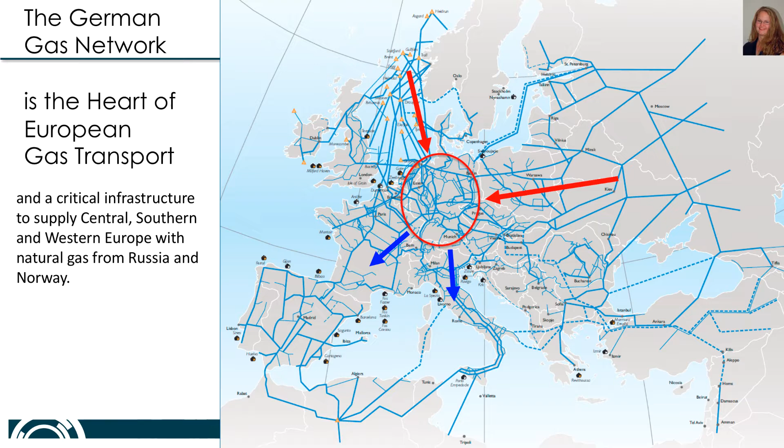The German gas transport system is located in the center of Europe. The majority of the gas comes from Russia and Norway and needs to be transported through the German network. Germany is the European gas hub. Only half of the gas entering Germany is actually consumed here. The other half is transshipped to secure the supply of Western and Southern Europe.

The liberalization of the European gas market in 2009 posed novel and difficult problems to transmission system operators. From the trader's point of view, the gas network is just a point, the virtual trading point, where you can inject or extract gas from. Limits are given by capacity products, either orders of firm capacity, which means guaranteed to be delivered, or flexible, which means the order will be processed best effort. The only other limitation is that traders need to make sure inflow and outflow are balanced over the full day.

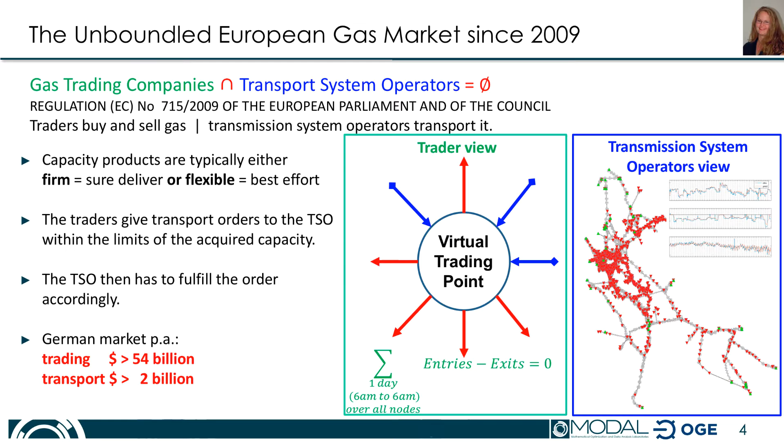From the transmission system operator's point of view, the network is a complex network. They have to ensure that all transport requirements of gas traders and consumers are met, even if this means gas injected in the north and immediately consumed in the south. Thereby, a transport market of about $2 billion enables a gas trading market of more than $54 billion.

The biggest German transmission system operator for gas is Open Grid Europe, that controls a network of 12,000 kilometers. This is similar to the size of the German Autobahn. To control the system, dispatchers operate about 100 compressor units with more than 3,000 valves. Keep in mind that this is a network built during the last 100 years and the oldest still operational part was built in 1916. There is no computer-readable description and it is not stuffed with sensors. This is solid engineering with 1,000 tons of steel.

Currently, the dispatching center is run based on measured data, which is only available in hindsight, and the experience of the individual dispatchers. A major challenge is the security of the gas supply. With the help of a high-end decision support system, OGE wants to meet these challenges and ensure safe, efficient and cost-effective gas transport. Because there's no comprehensive solution available on the market, OGE started the project Optimized Execution of Dispatching.

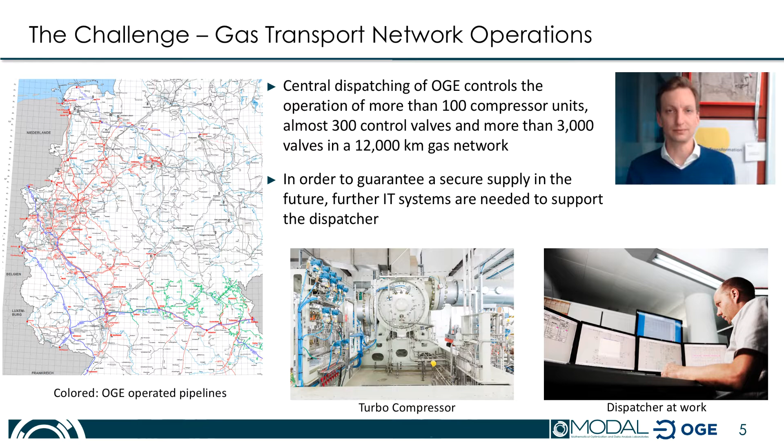The result of this project contributes to several levels of the OGE strategy. It makes an enormously important contribution to the sustainability of the company, especially since there's no comparable product on the market that solves our challenges. With the help of prescriptive analytics methods, it is possible for us to face the challenges of the future with composure. For example, past experiences cannot be transferred to the safe transport of hydrogen. Employees cannot scale increasing complexity and scope at will. Therefore, it is essential for OGE to have a decision support system in place to adapt to upcoming changes, such as market consolidation and the European energy transition.

OGE has invested more than $20 million in the development of the system over the past 5 years, and OGE has committed to continue the development cooperation for another 5 years. Savings of $1 billion can be achieved only for Germany due to the better network control and avoiding network expansion. This is a great economic benefit.

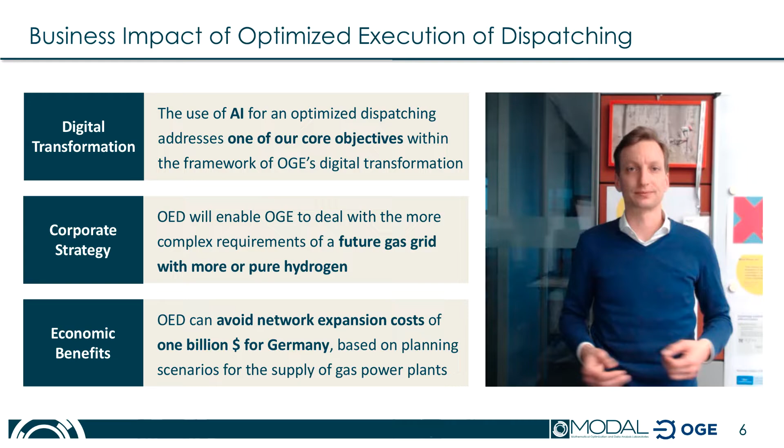Here are the main deliverables we have in the project. First, we needed a high-precision gas flow prediction. The system we implemented is 34% more accurate than the solution OGE had before. It has been in operation since 2018 and is continuously improved.

When Germany is going all renewable, there may come a day where the sun doesn't shine and the wind doesn't blow. To ensure the security of supply, several gas-powered power stations are declared system relevant, sitting on standby. If needed, these can jump into operation in less than 1 hour to provide gigawatts of power. But at the same time, they will instantly start drawing large amounts of gas out of the system.

As you have seen, the traders only have to balance their accounts on a daily basis. Now imagine the situation that the power station draws gas in the morning while the supplied gas is only fed into the network at a distant entry in the evening. Such a situation can endanger the security of supply.

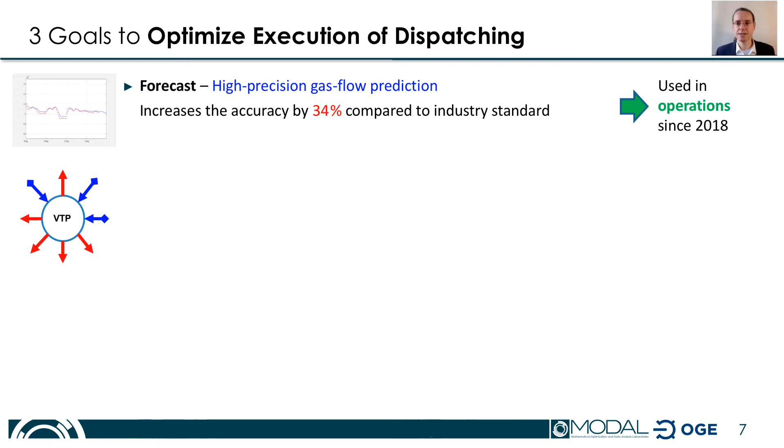One solution would be to build new pipelines. And indeed, the governmental network extension plan asks OGE to spend $690 million for this, as 1 kilometer of pipeline costs roughly 1.5 million. To not have to bury this amount of money into the ground, OGE developed a new product called Firm Dynamically Allocable Capacity, FDAC. Basically the same as a previous firm capacity product, but with one catch.

Now if OGE sees difficulties looming, it can restrict the power station to get their gas from a few previously designated safe high supply entries. But to make this work, a system was needed that continuously monitors and analyzes the situation in the network and detects possible trouble several hours ahead. FDAC is based on our improved forecast system and also in operation since 2018.

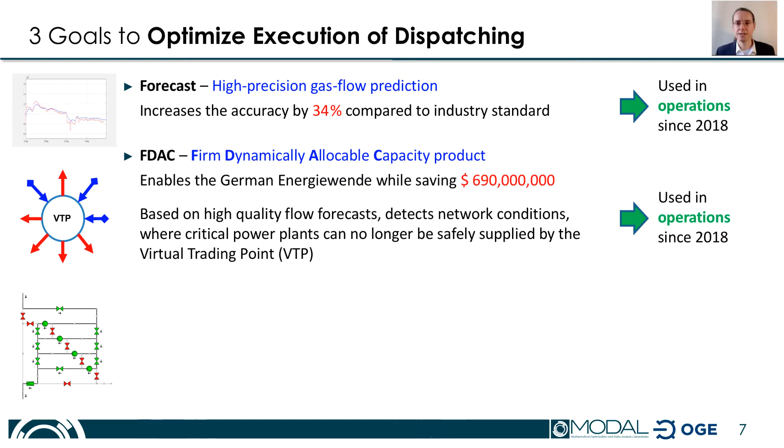Now the final goal is to build kind of a navigation and driver assist system for the dispatching. We call it KOMPASS. Every 15 minutes it analyzes the situation, computes optimized control decisions and gives recommendations to the dispatchers. Forward-looking command and control optimize solutions that can cope with future demands as the incorporation of hydrogen and ammonia.

This system is now deployed and has been integrated into the OGE IT infrastructure. We are currently in a stabilization phase where we continuously improve performance and analyze and check all the data delivered and the recommendations that are computed.

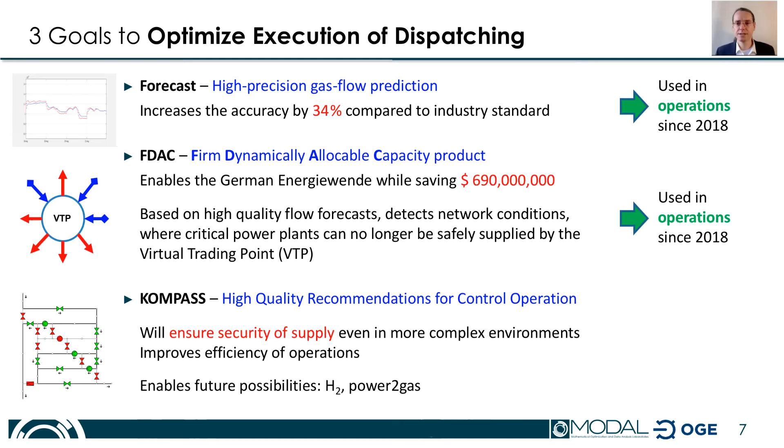At an early stage, the Modal Power Plant product tool enables OGE to recognize when the supply of a gas-fired power plant can no longer be reliably guaranteed from all points of the network and must be made from the specified entry point. With a secure supply of gas-fired power plants, we are making a significant contribution to the success of the energy system transformation.

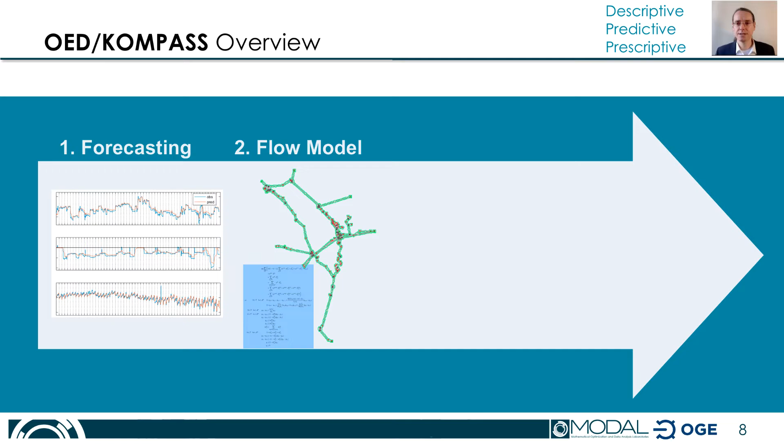Afterwards, at each station, we use a detailed model to find the precise decisions and operation modes to realize the flows computed by the flow optimization. Each station is rather special and specific and has to be modeled individually. Some are easy and simple, and others are nightmares of complexity. At the end, the computed actions are combined and recommendations are given to the dispatchers.

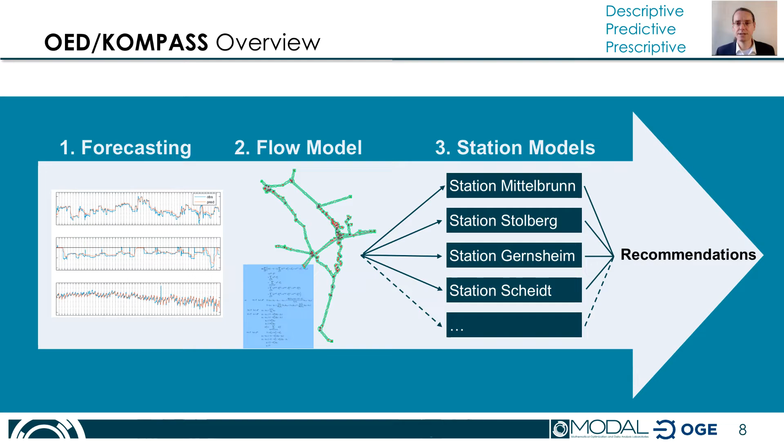Obviously, our system has to run 24/7 as gas is transported all the time. The situation continuously changes, so we compute an update of the recommendations every 15 minutes. First, we have to collect all the new data coming in. Currently, there are 3 external systems, which are connected by 9 different interfaces to our system. Based on this, an initial state of the system is constructed.

Since there are different time delays with the data transmissions from the sensors, the view of the system we get is hardly ever consistent. For example, you close a valve, but the flow sensor is not yet updated when we start the run and still reports a substantial flow. So the first challenge is to devise a consistent and likely correct state of the system.

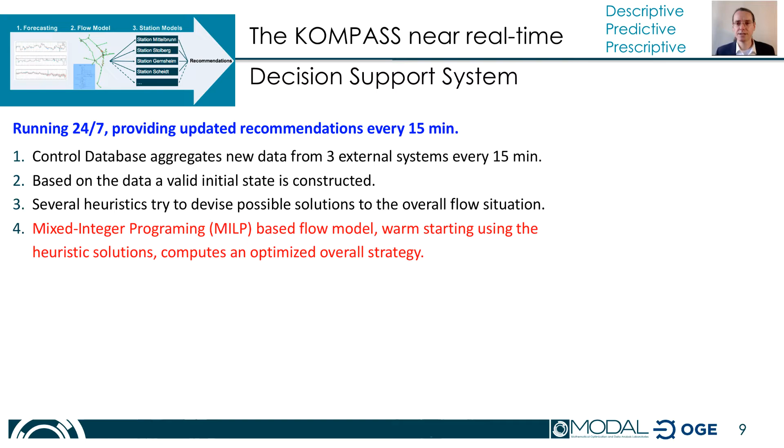Then we run several quick heuristics trying to find any feasible solution fast. With whatever we have now, we start our main mixed integer linear programming-based flow model. Actually, this is of course a nonlinear problem, but we have linearized the model to speed it up. This way we compute an optimized overall decision on the flows for several time steps in the future.

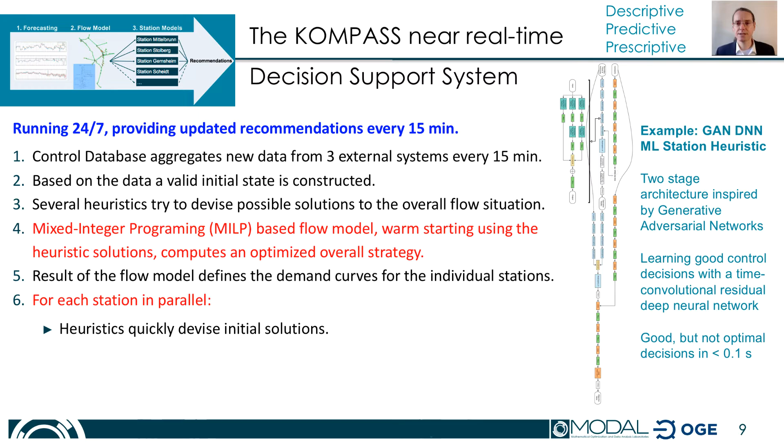These results then define the demand curves for the individual compressor stations. And now we compute the stations in parallel. Again, we try heuristics first. For example, we are currently experimenting with a deep neural network heuristic based on generative adversarial network architecture. Results so far are promising, and we believe this will allow us to scale up our approach better. Basically, the neural network tries to learn to guess the correct solutions of the integer program.

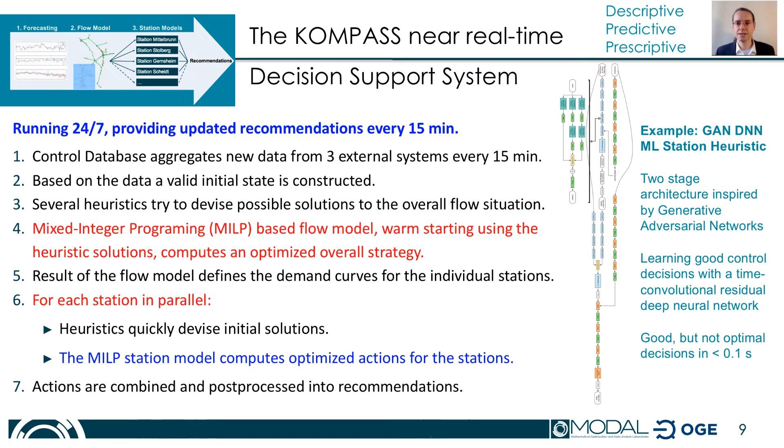Then we run the precise mixed integer optimization model for each station, taking all details into account as good as we can. Finally, the optimized actions computed for each station are combined, smoothed and post-processed into recommendations to the dispatchers. Here you see some of the underlying mathematical optimization model we built. Please keep in mind we are not just computing one setting of control decisions, but a timed sequence that keeps the network operating efficiently.

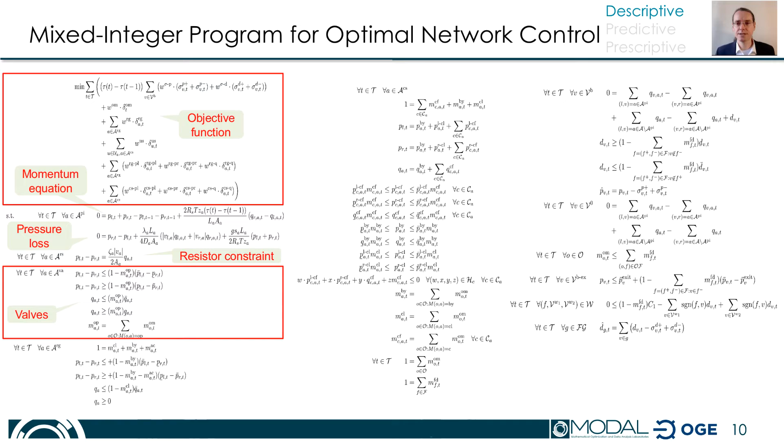Here you can see the elements of the model: the objective function, the momentum equation, the pipeline pressure loss, here are the resistor constraints, modeling of the valves and regulators. This is part of the model of the compressor station, and here you see the station selection. This is a general flow model with the flow conservation and demands, the exit pressure constraints, and the flow direction.

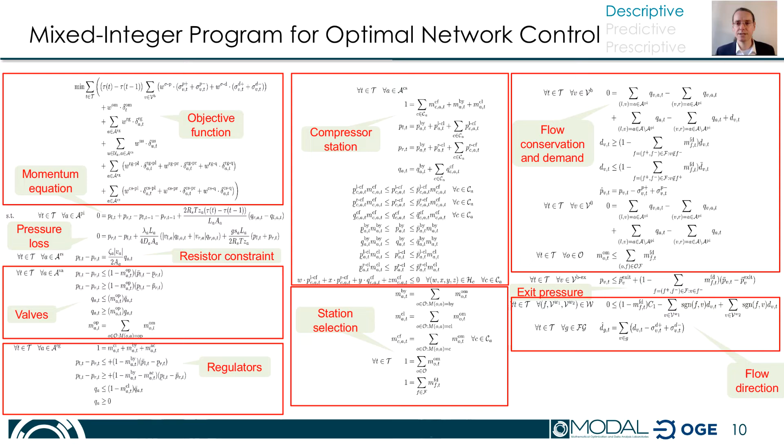We assume several simplifications such as isothermality and a constant friction factor in the pipes to derive this linear formulation. Unfortunately, the full model is computationally intractable, even for small networks, and thus we came up with the two-stage approach I showed you. Each part is dealing with one of the complexity sources, the overall transient gas flow on the one hand, and the detailed combinatorics at the junctions, that is the compressor stations, on the other. Let me show you a few more details.

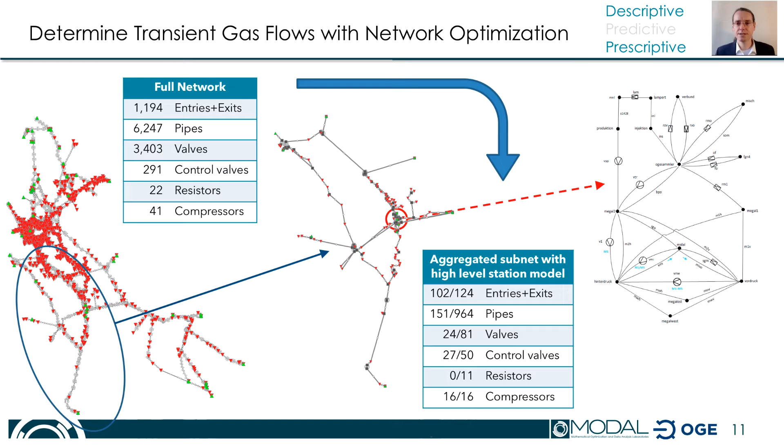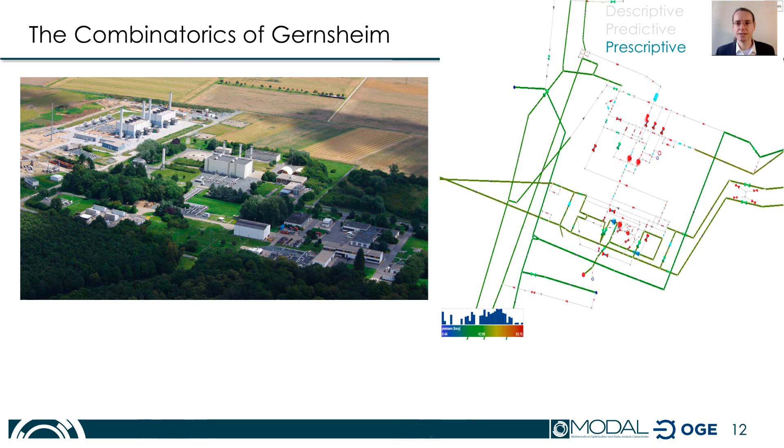Solving the transient flow problem for this network, we derive flow directions and coarse control decisions at the stations, which then have to be detailed and validated in the subsequent step. Let's look at one of the most complex stations, Gernsheim. All these buildings you see on the left picture are just one compressor station. On the right you see a schematic view. You see the outgoing arcs, and at each arc is a command profile over time computed by the flow model, like the one shown here.

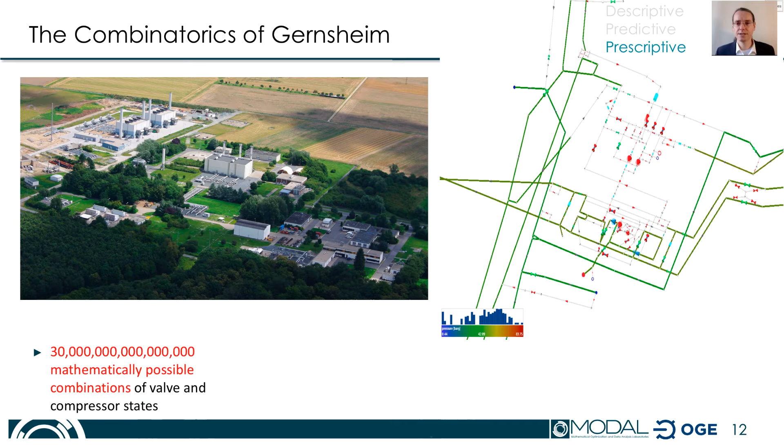As mentioned before, taking into account each possible state for each actively controllable element of the station, we end up with 30 quadrillion possible combinations. From these, there are about 200,000 technically valid combinations, so-called operation modes, based on the knowledge of the dispatchers. Analyzing historical data, we were able to reduce this number to 1,285 necessary operation modes, covering nearly all technically feasible options. These were just the discrete decisions. Once an operation mode is chosen, there are several connected continuous values that have to be determined accordingly. And remember, we have 40 of these stations, though most are a bit easier than Gernsheim.

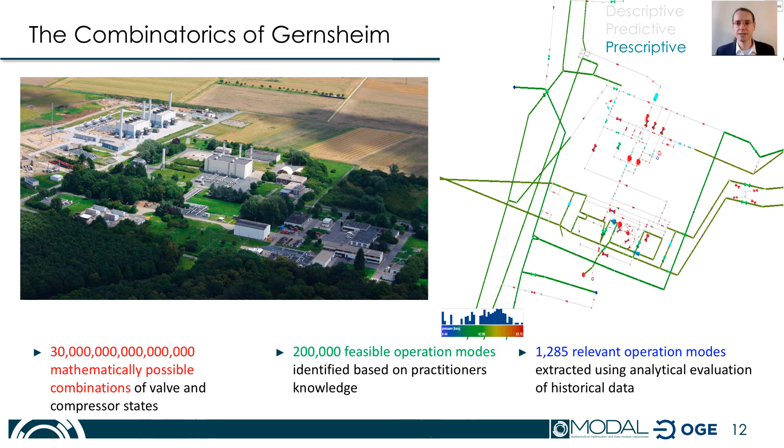Here you can see a demonstration showing the result of the computations for a station. On the left diagram, the colors show the pressure level of the pipes, the amount of flow is indicated by the thickness of the lines, and the arrows show the direction. What you can see here is a reversal of the flow over time in a station. On the right you see the current operating point within a simplified characteristic diagram for two of the compressor machines.

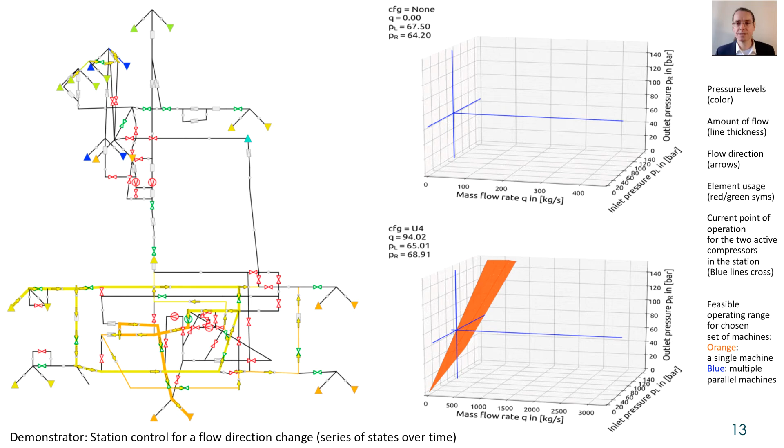As with all engines, there is a feasible operating range. Here it is defined by input pressure, input flow, and desired output pressure. Then, depending on the drive of the compressor, there is a certain optimal operation range where the machine runs most efficiently. I won't go into details, the whole thing is rather involved. The performance of the compressor even depends on the outside air temperature. You can make this arbitrarily complex. We spent a lot of effort to come up with a simplification that can be computed reasonably fast, lets us stay within the feasible bounds and favors the optimal operating point.

To feed the Navi with future gas demand and supply for up to 24 hours, those being the boundary conditions of the prescriptive problem, we have to forecast the flow at more than 1,000 different entries and exits. As they represent various types of transport customers, ranging from power plants, border points to other countries to industrial end users, their statistical characteristics differ a lot. So obviously, one forecast method will not do the deal. And since the Navi needs online results, we need a computationally very efficient method.

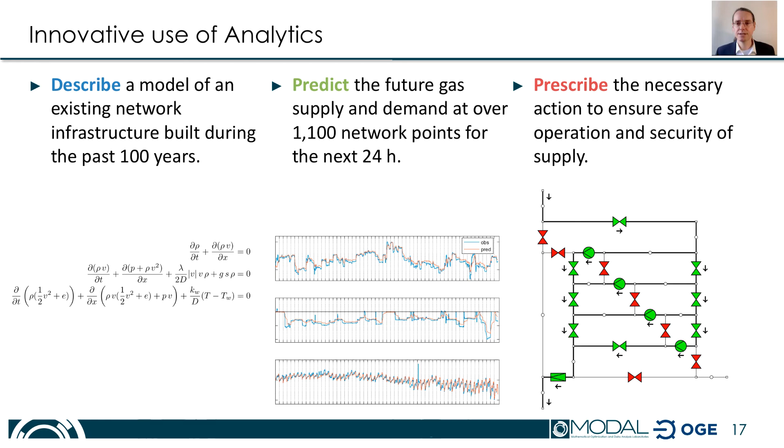After building models on various levels, we built a system to predict future flows at the 1,100 network points of the network. Building on top of the description and the prediction, we devised a complex algorithmic system to prescribe optimized decisions. This is a strategic project. To our knowledge, we are first in the gas industry to build and implement such a comprehensive system. To be first means we are bleeding-edge technology and pay a lot for being pioneers. It will be so much easier for anyone afterwards, in particular as we publish our results.

We help save hundreds of millions of dollars. Gas transport is a monopoly. Profits are capped, so the cost of the infrastructure is put on the customers, which are businesses and society. This project makes the energy supply safer and less expensive. Just now, we see in this crisis, if essential infrastructure depends on the knowledge and experience of a few people, we are vulnerable. By providing decision support, it is possible in a crisis, also for less experienced dispatchers, to keep the system running.

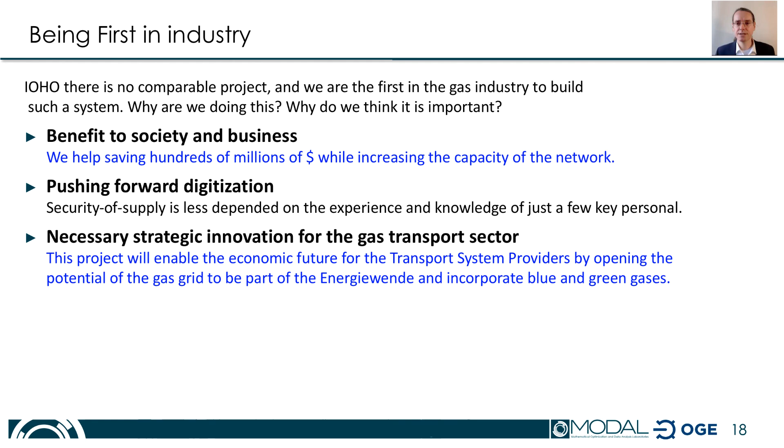This project builds the economic future of the transport system providers. Natural gas as a fossil fuel is planned to be abandoned within the next 30 to 50 years. At the same time, gas is an excellent choice to support the transition period. Unfortunately, this requires expensive changes to the network. Nobody wants to invest into something without a future. We create the potential for more flexible use of the gas grid. First, we enable mixing hydrogen and possibly ammonia into the gas stream, then further on by providing the necessary optimization to make use of power to gas. And finally, by supporting the use of pure hydrogen transport, which needs a much more agile control than natural gas.